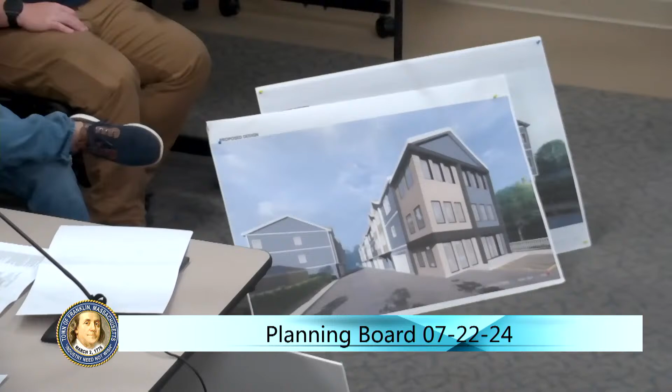As mentioned, we did submit an updated stormwater management report. I think we've addressed some of the bigger issues, but I think Carlos and Matt, if we continue the meeting, may be able to really rough out the edges on that.

We've also gotten, as mentioned, the trip generation assessment from Vanessa. I believe the conclusion of that report is that there are no significant impacts that would be created in vehicle trips, vehicle travel, queuing, or delays in and around the site, which includes not just East Central Street, but also the Lewis Street access point. Because as you recall, this is a one-way drive coming in from East Central, exiting onto Lewis.

And I believe if you take a look at the report, they do mention how many vehicle trips they anticipate taking Lewis and how many would go to East Central. But in either case, both during the average morning peak as well as the evening peak, there is no significant impact from what would be developed compared to the current use as a single-family home, as well as the daycare, which was a use formerly at this location.

Let's see. Oh, and I should mention lastly, this is for Jen, the northern facade of the building. I think when we first presented to you, it was kind of a blank slate, and it did have kind of an unappealing look. So they've redesigned that on Building A as it fronts East Central Street. So it added a few windows. I think it was a real positive change.

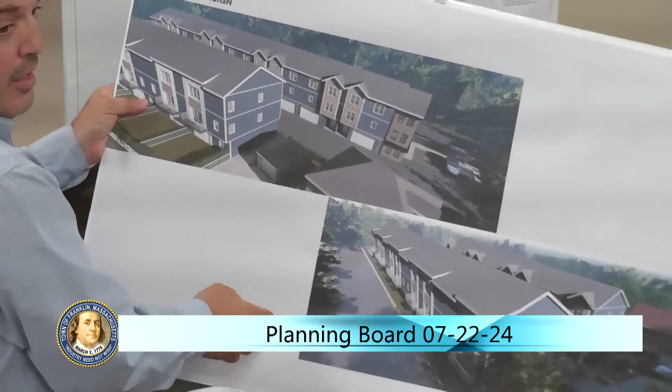We have a door so that people on Lewis Street can access from Lewis Street into it. Also, there will be a walkway along the back of the building that people can enter from both sides, instead of coming from the driveway side. Sure. Will the people in the Lewis Street units have private patios, or is that going to be a shared yard with shared amenities? What is the use of that green open space going to be?

We anticipate that they're going to be private yard spaces for each of those units. So will you be providing plantings or any sort of screening or privacy along the Lewis Street edge? Yes, on the landscaping plan we show hedges along the whole Lewis Street side on C105. What is it, C105? Yeah.

And we put some trees and stuff along. Oh, okay, so there, I guess I didn't see the legend on that, or couldn't quite tell what those plantings were because of the symbols. Yeah, I see. They look like hedges, arborvitaes, but is that just a low growth, or is that gonna be something that's gonna create a nice buffer? Three feet tall, or is it gonna be just 18 inches and that's the end of it?

We provide these Chinese junipers, so I believe they're ground cover. Yeah, so they're low, so the conceptual drawing has almost a hedge, but the junipers that are on your landscape plan are low growing. It's ground cover. Right. And then there's four arborvitaes being shown.

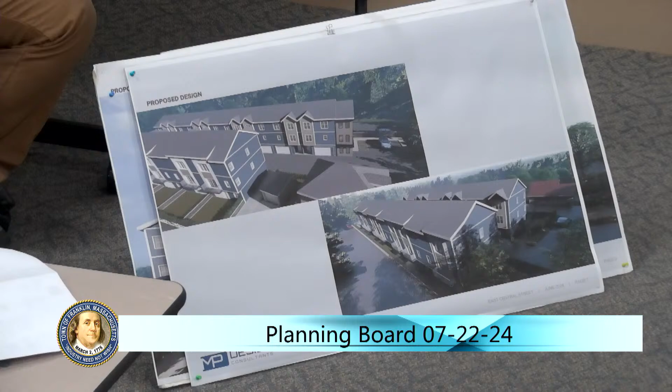The other comment is the north side of the building on the east is still a pretty prominent facade, even though right now I know it's set back from East Central Street. It might be nice to have a bit more trim or architectural character on that north facade of the smaller building. The commercial facing portion of the building, what is the intent of the big black band? We just like to form some sort of band around it and create volume, and the two different colors.

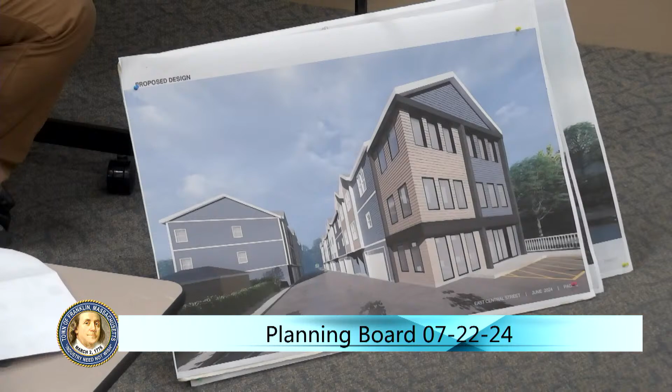I'm just wondering if that could be tweaked a little bit more to be more in the character of the rest of the building, and if there's gonna be differentiation in color or window expression, that it's more closely tied to where the commercial is happening. Right now it feels a little arbitrary. But if this is going in front of design review, I'll let them get into specifics. I very significantly appreciate you addressing what that experience is on 140 and having that commercial be expressed differently, or at least be noticeable against the residential.

Overall, I think this is a great scale project for the site, and I appreciate the time that you've taken to address our comments. Thank you.

Anybody? Thank you. All right, I'll go. Jay?

Sorry about that, I had a needy customer.

I want to lead with, I appreciate the revisions to the plan. I think switching the driveways around on Lewis Street is going to pay a lot of dividends, both in terms of aesthetics and in terms of drainage.

I guess the only other bit I had was to echo what Mike said about putting granite curb on the driveway entrance on Lewis Street. I think you're really going to see that work out positively as well, just from the snow and ice removal aspect of things. If you put a sloped HMA edging on the radius like that, it's going to get chewed up within a winter or two. So granite is definitely the way to go there.

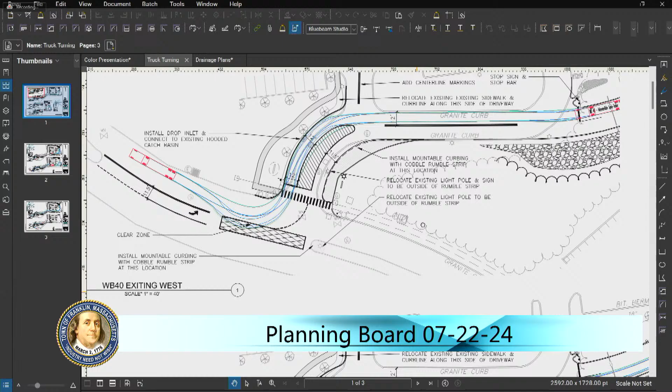We have provided an egress for WB40, showing that they can maneuver through the break in the existing island on Forge Parkway, traversing the driveway. They do encroach into the white painted island, but they are still maintaining a 12-foot clear area for anybody exiting the site, either the hotel or the industrial building.

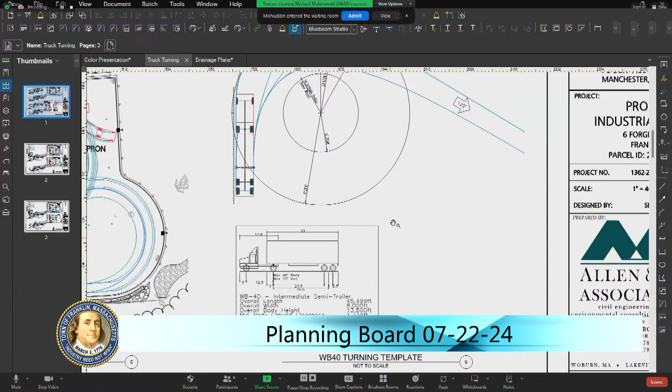Could you do me a favor and explain to everybody what a WB40 is, since some don't know? All right, so WB40 is a box trailer with an approximately 33-foot trailer on it. If you have ever seen a Sysco delivery truck or a large UPS truck, that is the size of it. It's not the traditional sleeper cab trailer, so it's a slightly smaller truck and trailer.

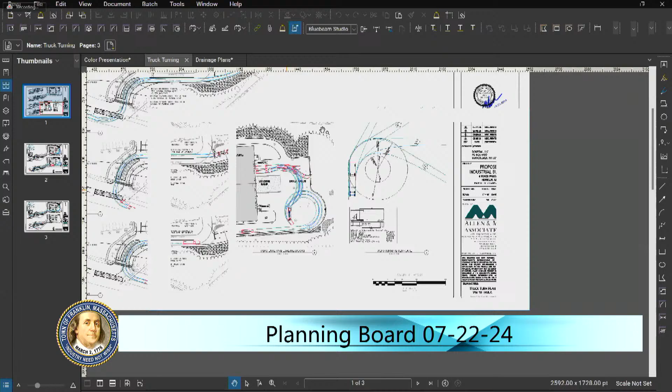As you can see, part of the concern of the board before was the maneuverability into the loading docks at the rear of the building. We have increased the bulb of pavement in this area and can show that you can do a complete circle in this area and then back into the loading dock positions. So that's the upper ones, and these are the lower ones where they can pull up and back in.

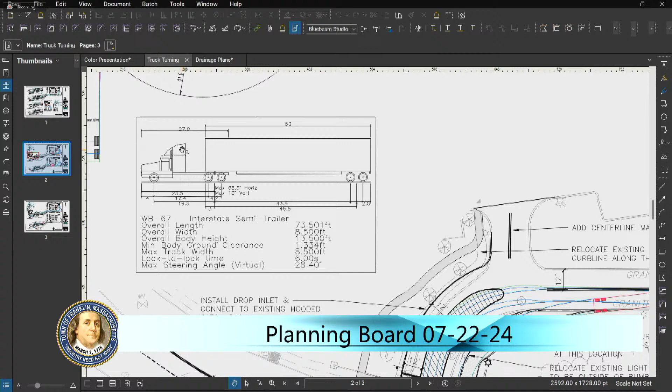The bigger concern is what is a WB67. That is a 53-foot box with a 28-foot tractor. Typically that would be an extended sleeper, those are the over-the-road haulers. Part of the cobbled area in the front here is to accommodate those movements.

This is shown entering from the east from within Forge Parkway. We feel that this is a very unlikely scenario due to the proximity of 140. The majority of the traffic for trucks would be coming from the west, as shown in this direction.

So we have a WB67 entering the site. There is some cross into the painted island and over the cobbles, but it still maintains a 12-foot clear access for anybody that may be exiting the hotel. And then similarly, if a WB67 comes out from the facility, you can see that he stays within his 12-foot aisle, maintains access on this side over the property line, and heads out towards 140.

Additionally, if he should head farther into Forge Parkway, shown this direction, part of what we're proposing to do is to relocate a light pole that's on the corner of this island back a little bit, as well as provide some cobbling on the corner. By doing that, we feel this movement is very unlikely. The vast majority of these drivers are actually going to want to head out to 140 as opposed to heading into Forge Parkway. But should they mistakenly end up in this direction, we do have the ability to have them exit the site without causing any impedance to anybody coming in.

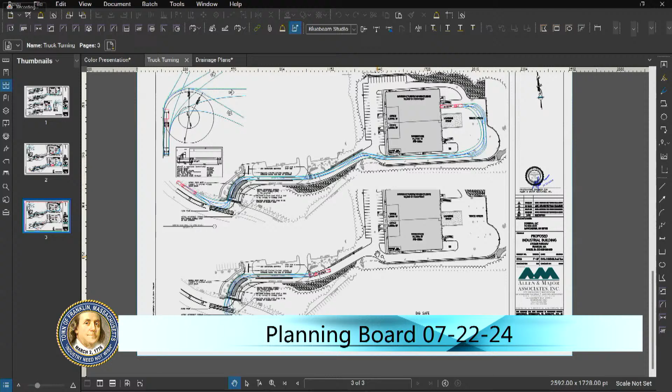Relative to the drainage, we do have a large infiltration system going in the back of the facility, which collects water and discharges to the east corner of the property. That's where the vast majority of the drainage goes now.

As Matt had indicated, we did have some additional test pits that were done. There was some confusion as to how those were placed or located and what the elevations actually are. So we've indicated that we will send our survey crews out there to field verify exactly where those are, and nail that down so we can get an accurate depiction of where the seasonal high water is in that area. Happy to answer any questions the board may have.

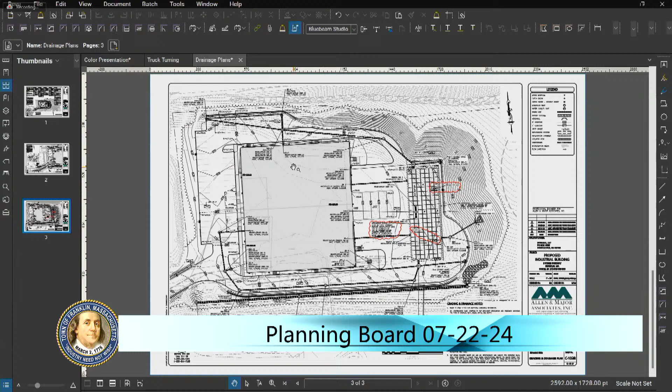Okay, thank you. I guess I'll go to Jen first. Thanks. Through the chair...

It appears that to widen the roadway, you're proposing moving the sidewalk that connects the hotel pedestrian way to the public sidewalk, but it looks like you're proposing that be pavement where the existing is concrete. I would ask that you replace it in kind with concrete, and make sure the public sidewalk remains concrete to match existing all the way through. Okay, that's all, thank you.

Yep. Chris? Yeah, thank you, Mr. Chairman. Have you approached the hotel site owner about reconfiguring the entire entryway to get rid of the hard left turn kind of loop coming out into the roadway, and see if there's a way to straighten that out so it's less of a nasty turn coming out of the site? Is that a conversation that's been broached at all?

We have been in contact with the hotel owner generally, not about that question specifically. We would be happy to do so. It's a good idea. Yeah, I just think it maybe eases a lot of these in and out concerns, types of trucks restricting your tenancy, which is just going to hurt your feasibility in the future, I think. So that'd be one option.

And then the other thing, I know Jen had mentioned, and we are still waiting for just the vertical rendering from 140, so we can kind of see what that box might look like from that side, where right now it's tree coverage. All of a sudden I was driving down 295 the other day, and you come over the top of the hill going into just past Cumberland, and there's a giant Amazon box sitting on the top of the hill, and that's all you can see. So, obviously, I don't think this is an Amazon building, but that type of giant facade out in the middle of trees is a little off-putting. So just making sure we have an understanding of what that might look like. That's all, Mr. Chairman, thank you.

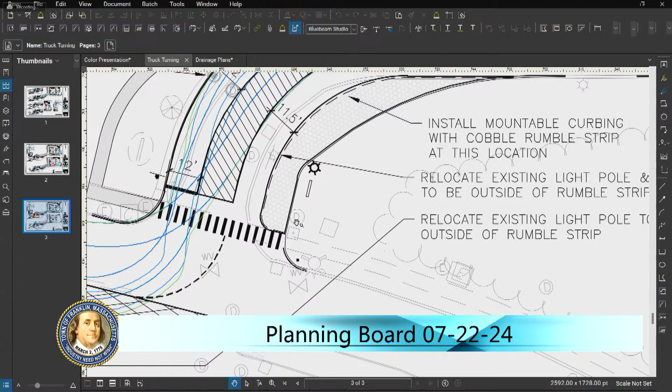It is, and we've also got some big drain structures. So this is actually a treatment device here that collects the water, goes across. We also have an electric vault that's here that feeds and continues up. So I'm pushing out this as much as I can on this edge without getting into all of these other structures.

Yeah, that was really my only two thoughts, to try to get around the turning movements, you know. Do we need this truck, or can we tweak that somehow? But I know that's a lot of constraints over there. Yeah, I got a lot of constraints on this side. I've also got quite a bit on this side as well.

I mean, we've got hotel signs, we've got fully established trees on this side, and I've got electrical and communication vaults over here. I've pushed left and right of the existing driveway as much as I can, and still trying to not get into significant impacts to existing substructure.

And I think, like Ted had mentioned, on what kind of truck, the 67s, this is a worst case scenario, but we're just trying to keep our options open so that should a tenant come in and need one of these during their course of operations, that it can be fitted. It's more likely that the WB-40s are going to be the vehicle of choice out here.

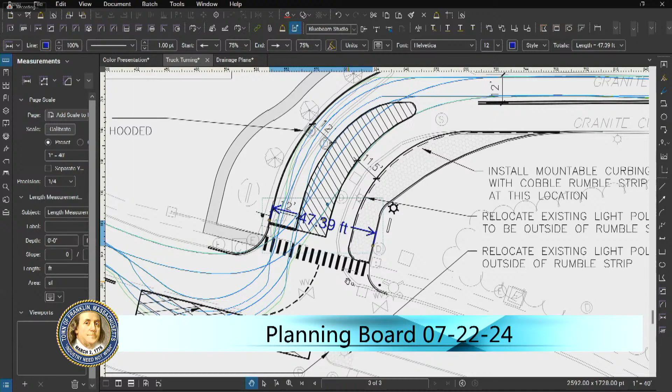So you're gonna have to look at an option of taking more of the right-hand side of the site or the left-hand side of the site to open it up. I don't think you have much option, because our big fear is that you have a hotel there with, you could have children in there, elders, everybody coming and going, and we can't have trailers taking out the front end of a car or somebody leaving there, so you gotta make sure.

Well, and in this scenario, they don't. So we have a 12-foot drive and we have a painted island, and then we have another 11.5 foot of clear that's open for vehicles coming in. So if somebody happens to come in and they're sitting here, there's plenty of room on this side for a trailer to exit. Okay, but entering is the problem. Yeah, entering is the same way, sir.

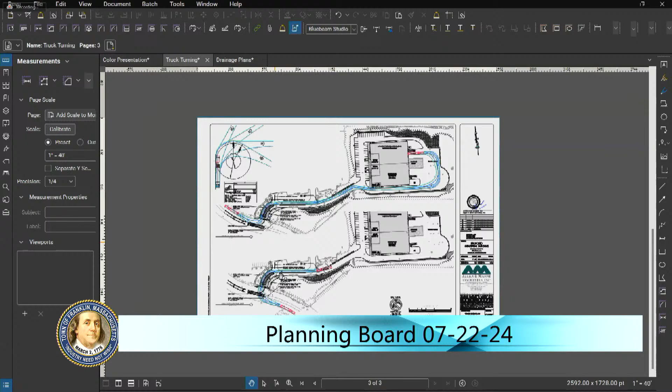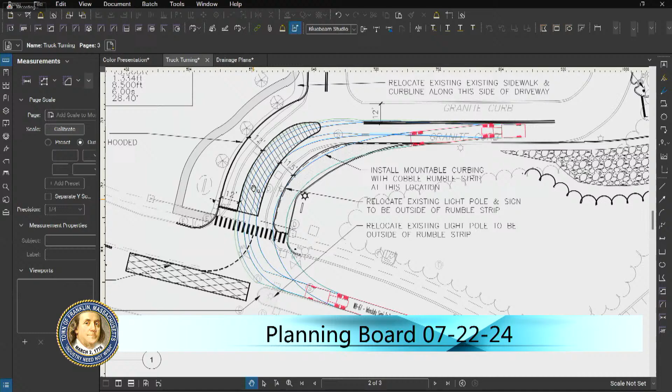But not on the right-hand side, coming in from within the park, because I do a lot of work up in that park, and the trucks do go from building to building. They do. He has 12 feet of clear. So if they come in from Forge Parkway, they come in and they take the painted island and part of the rumble strip, but there's still a 12-foot aisle that's clear for anybody that may be coming out of the hotel.

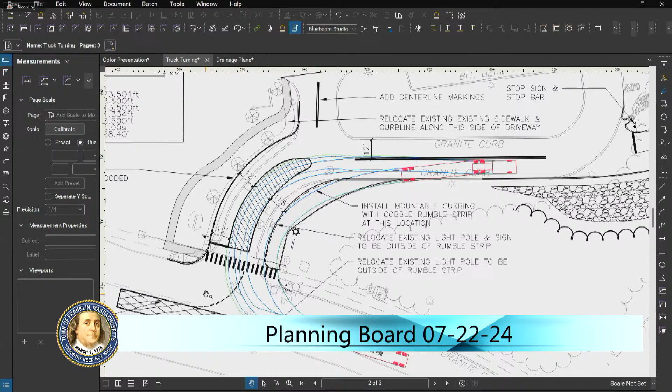So currently our design shows that we have adequate clearance for folks exiting aside from truck movements. And it all works on plan, unfortunately, but when you get an over-the-road... Sure, if I may, Mr. Chairman, I know Beta did mention that their traffic folks hadn't had the chance to review. I just want to stress the point, I think you're all good with everything but the main entrance. And I think if Beta can weigh in and you guys can open up the throat of that a little bit more, let's have less obstacles for a truck to get in.

What we don't want is for that truck to continue down to 140 and somehow want to turn around. That's my biggest fear, and they will do that. I don't just want to say everything else is smooth sailing, because through what Chris was hitting on, I think that facade along 140 is... Yeah, really. So I mean, functionality of the site is what I mean, safety-wise.

When you mentioned that, Chris, I just circled back on the site section that you showed, and it happened to be the one that maintained the most amount of vegetation to the new building, and wasn't the site section taken from the part of the site that eliminates the most amount of vegetation towards the west. I think we have a very prominent facade here, sitting at least 40 feet above street grade to the top of the building, at least from what I could see in the site section. And so I want to make sure that everyone understands that.

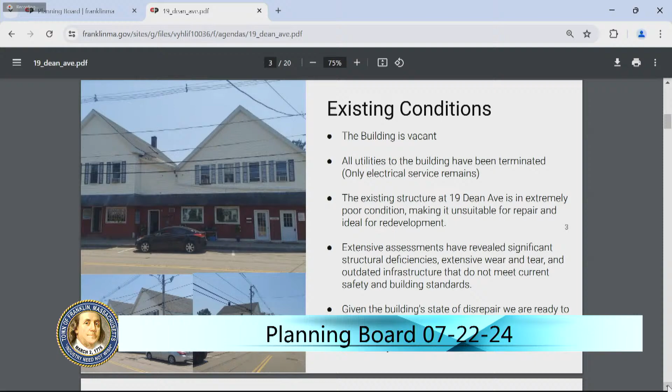All the feedback we got at the April 8th meeting, we feel we've put into this new concept. It aligns. The last 6 months, all I've done is listen to the master plan and Franklin's business guide. I think the board should support something like this. The kicker is that we can't do commercial storefronts and parking. It's one or the other. We came with parking, and the board didn't like it. This concept activates all the commercial storefronts at grade with residential above. So we're proposing 6 to 8 units, no parking.

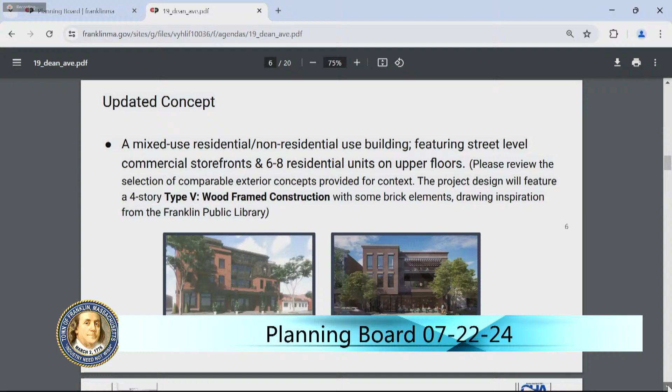So this is the proposed site plan. We have about 1,500 square feet of commercial storefronts. We're thinking fitness, or a Birchwood type thing, in one of the spaces. The trash is in the back southeast corner. We have no access to the site as is, so it's a really difficult site. We reached out to as many people as we could.

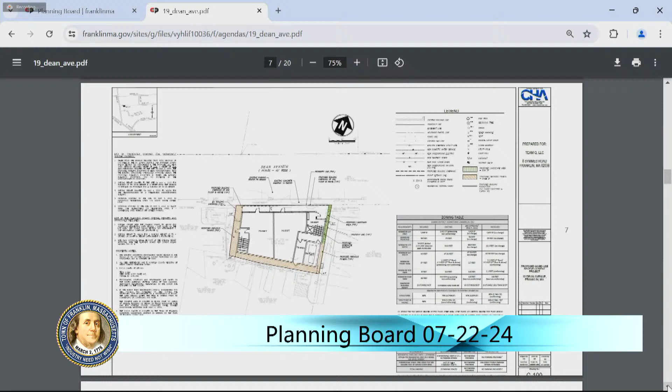Our right-of-way is Dean Ave, but there were safety concerns with having parking or drive access off Dean Avenue. So the only other way, technically, if we're trying to do commercial storefronts, is off the town lot, which is 7 spaces, and there's a parking exhibit on the next slide, I believe.

Oh yeah, so this site is the only site in downtown commercial that I could find that's pre-existing, non-conforming, has no existing parking in less than 3,500 square feet, making zoning almost obsolete to what we're trying to do. Because again, we can't do parking and commercial storefronts, one or the other. So we're really just trying to get a green light on a concept, so then we can come back and tune it up and go from there. It's really the point of this meeting.

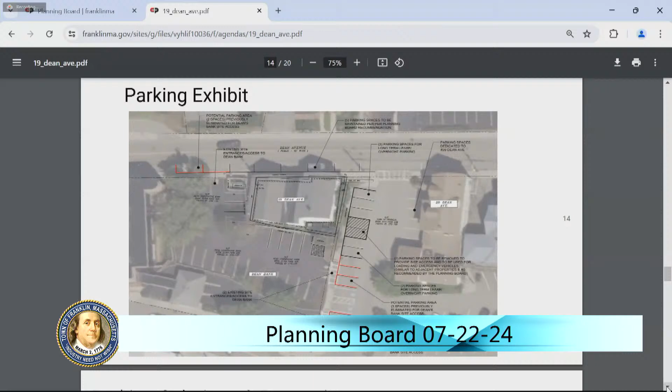We did a parking exhibit showing where in 2001 Dean Bank was granted, where the red markings are, extra access to the rear. So we're not even asking for access, we're not asking for a curb cut, we're just asking for essentially those 7 spots, which I think in turn would be 6 or 8 residential units. Those are some solutions we came up with for parking.

You can keep going, another one. Obviously the MBTA is a pitching wedge away. And you can go another one. Yeah, please.

Okay. Again, we think this aligns directly with the master plan and the business guide for small businesses and development, especially in downtown commercial, and they're pushing for mixed use, and based off what your feedback was on April 8th. Really wanted to get your feedback. I know we don't have a rendering, but kind of wanted to have a conversation, because I can't get a conversation anywhere besides this public forum.

Sure. But before I go to the audience, I'll go to the board. I guess Jen wants to ask a couple of questions. Are you surprised? Through the chair, actually, I guess I don't really have questions.

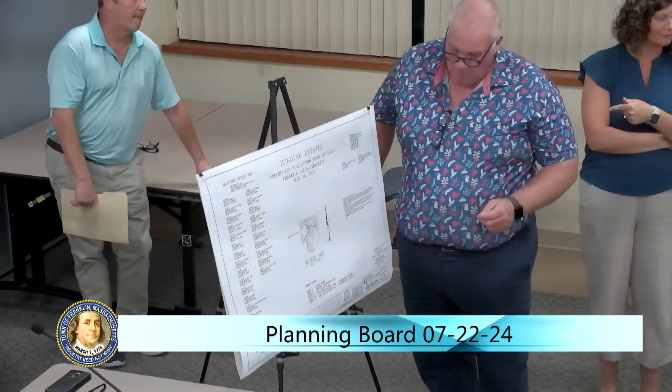Oh, yeah, sure, that's fine. Could you get that? Yeah. And then put it on the screen? There we go. They're trying. Yep. Make it a little easier for you to see.

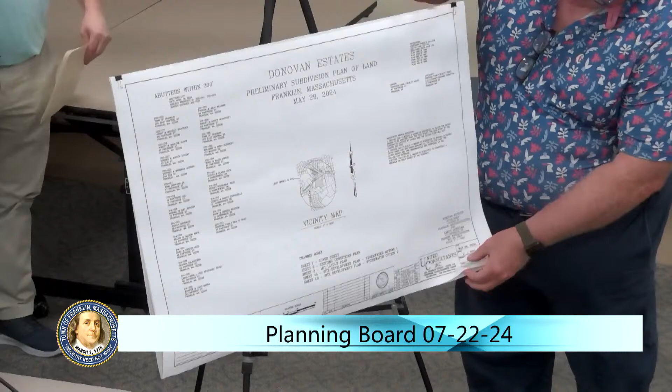Alright, so this is the general idea as to where the property is located. We have Elm Street, Dover Circle in the vicinity. Provided you with an existing conditions plan. Currently, the house has a driveway, pool, garage, driveway in this location here, serviced by town sewer, and a private water service with a well.

As Amy mentioned, the proposal is to develop the property with a roadway system that complies with the town subdivision rules and regulations, with the exception of the waiver requests, providing 8 lots for buildings, as well as a parcel for a detention basin. So what we have done is provided 2 development options.

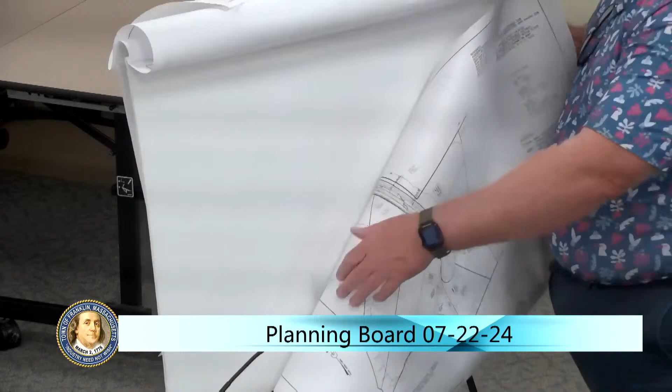One would be a conventional roadway system, which would provide for catch basins for capture of stormwater and then discharge into the detention basin area. The second would be for a roadway development that would provide for a swale to be located on the side of the roadway, capture the stormwater, with crossings at each of the driveways.

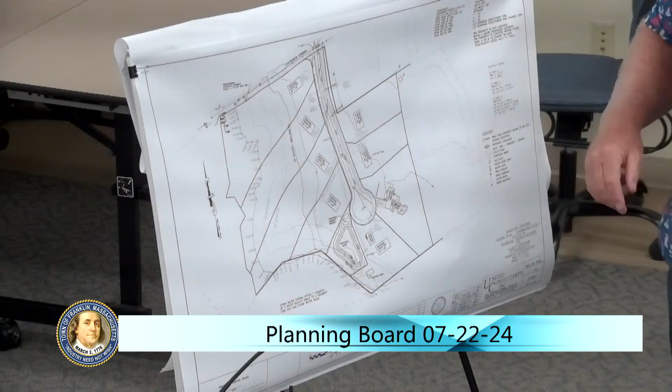I've actually put together a little packet, if I may, to hand them out, just to give the board some ideas of what we're talking about.

Watch out for the cords. It's a trap. Yeah. That's one way to get rid of one.

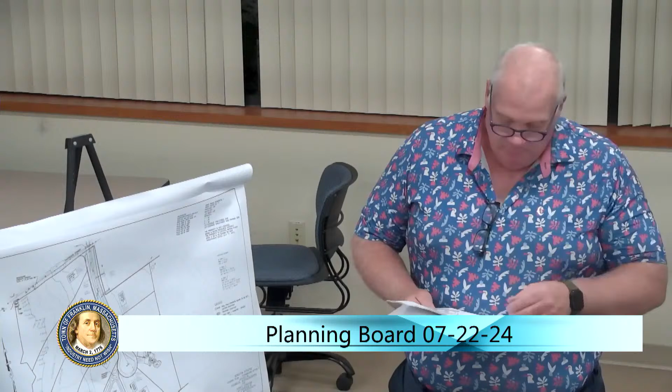So, we did anticipate stormwater being an issue with this site, and how to deal with it. So, what we did was we looked at 2 different options. We provided you a little report here, and in Appendix A, you would see a typical roadway cross-section with a road that would be crowned in the middle, sloped towards each side, catch basins at various points to collect the stormwater.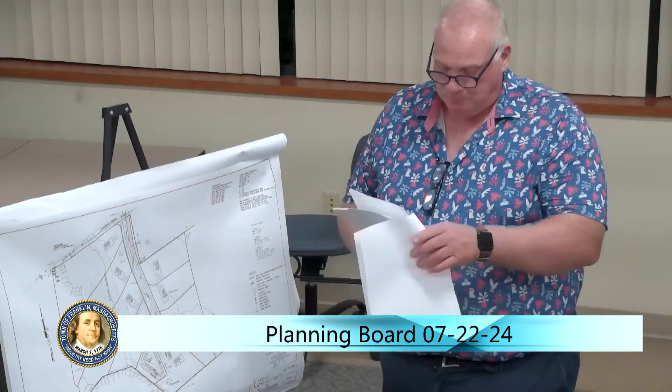In Appendix B, we provided a little different option, which would be a roadway that would be elevated from one side to the other, no crown, direct the stormwater towards the swale area, which would be located on the down gradient side, one sidewalk on the opposite side. And then in Appendix C, we've given you some pictures of examples of this project we had done in Norfolk, Norway Farms, located off of Medway Street.

And you can see the swale integrated into the front yard, the drainage pipe being installed at the crossing of the driveway. You can see the stone check dam for velocity dissipation and to allow for settlement of the stormwater. The second picture is looking upstream from that. House is under construction upstream, but you can get a feel for the check dam in the yard and how it integrates in with the driveway.

And then lastly, is a third picture from a project in Wrentham, where you can see the driveway crossing in the swale, and this has a more conventional curbed roadway system, which is, you know, a different option. And then in Appendix D, we provided the water quality information for a grass channel, biofilter swale, as it was previously called.

So we just really wanted to talk with the board about those options before we went to the next step, you know, soil testing, moving forward into a definitive design, see if there was any traction on this alternative. I'm certainly happy to work with Beta and Mike Maglio as we work through the process, if that was something the board would entertain.

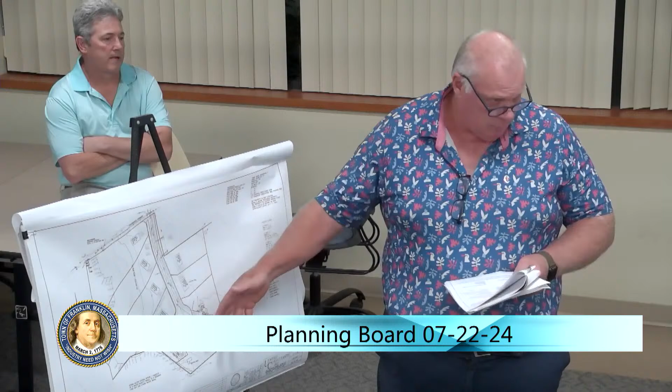And I would also like to point out that there is an existing sewer easement here, an interceptor line that runs through the property that would be located within the roadway, and we would be petitioning the town council for an extension of the water main. But the sewer's already there. Okay. So, certainly happy to answer any questions the board or the neighbors may have. Really wanted to just get out in front of the stormwater.

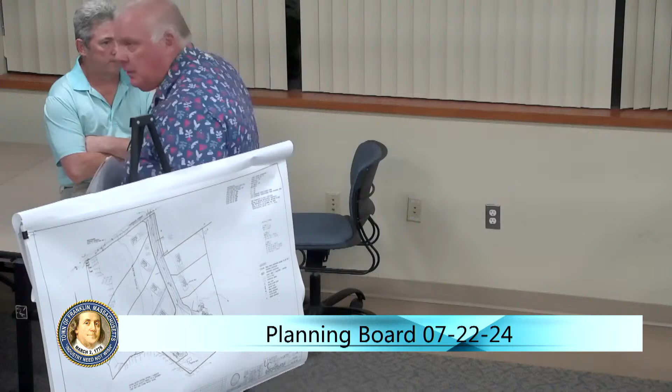Okay, thank you. I guess I'll go to the board first before I go to Mike and Beta. Comments, questions?

My first question was going to be, why not a sidewalk on both sides, but now I see why. I guess my question is, the third image in Appendix C—alphabet was not my strong suit—how does the granite curbing work with the swale in regards to water getting off the street?

So in this particular application, the water was trapped in the swale from the yards. So that's a yard catch basin system as opposed to the street. There's an underground infiltration system under the cul-de-sac for the roadway drainage. So they kind of had a hybrid for the lot drainage. In our situation, the lots are draining away from the road, the majority of them on the right-hand side as you go up the road, so that wouldn't be as applicable, but that is an option.

We've done it different ways. We've allowed for sheet flow off the road, done a gravel diaphragm. We've also had, in the one in Norfolk, breaks in the curbing with paved runoff areas into the swale, and then immediately put in check dams to provide for some slowing of the stormwater and some settlement at that point, almost like a forebay. So we've seen different options.